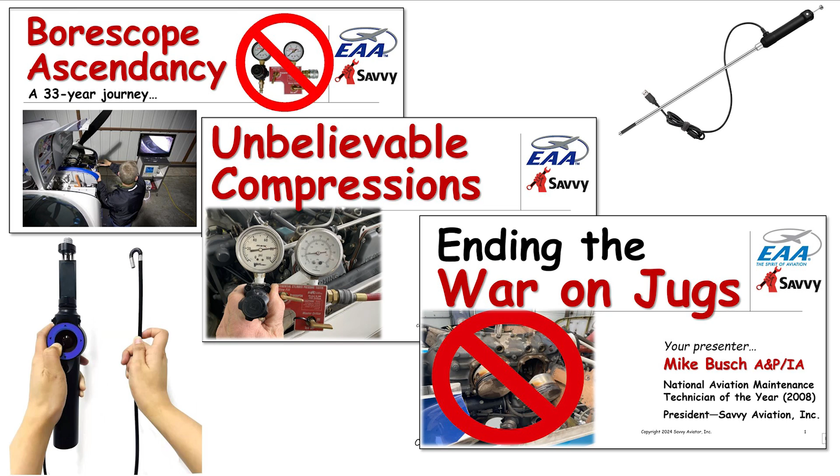Now, you guys may be sick and tired of hearing me talk about borescopes because I've talked about it a lot in previous webinars. Here are some of them, including the one I did last month called Ending the War on Jugs, where we talked about the fact that problems in cylinders don't always mean the cylinder needs to come off, and the borescope is what helps us assess whether a cylinder can be cured of its illness without removing it.

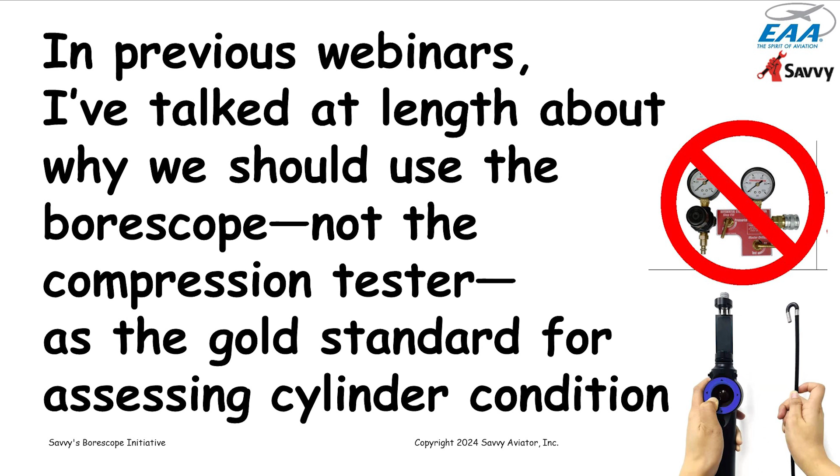So I've talked a lot about this stuff, and about the fact that the borescope is a vastly better method for assessing cylinder condition than the old-fashioned compression test, and that borescopes have become enormously better over the last few years, and their price has dropped precipitously. So you can now get borescopes that provide absolutely awesome image quality and the ability to take images we were never able to get before, at a very reasonable price.

The borescope here is a Vividia VA400, which at the time I made this slide a couple of weeks ago was on sale for $299.95, and somebody told me yesterday that they got one for like $225 from Oasis Scientific, who manufactures it. So they're kind of amazing bargains for what they do.

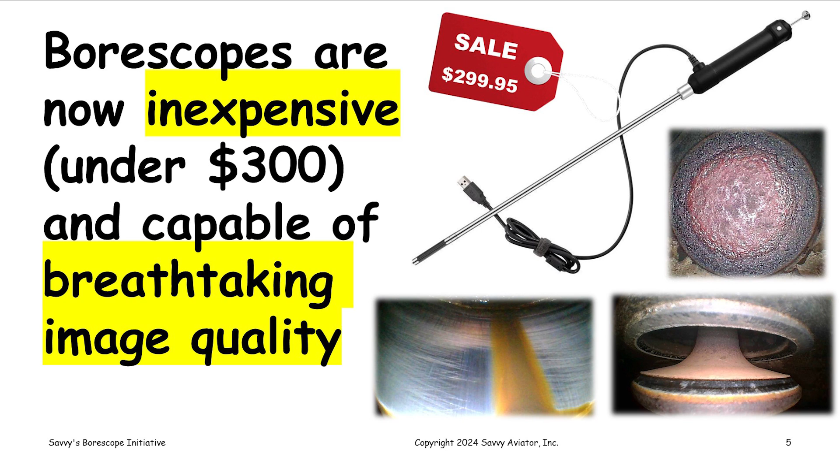The compression test may tell you that a cylinder is sick, but the borescope tells you exactly what's making it sick, how bad it is, and whether you've caught the problem early enough to remediate it without pulling the cylinder off, using non-invasive techniques I talked about last month - lapping valves in place if it's a problem with an exhaust valve, or doing a solvent ring flush if it's a problem with the rings and air getting past them.

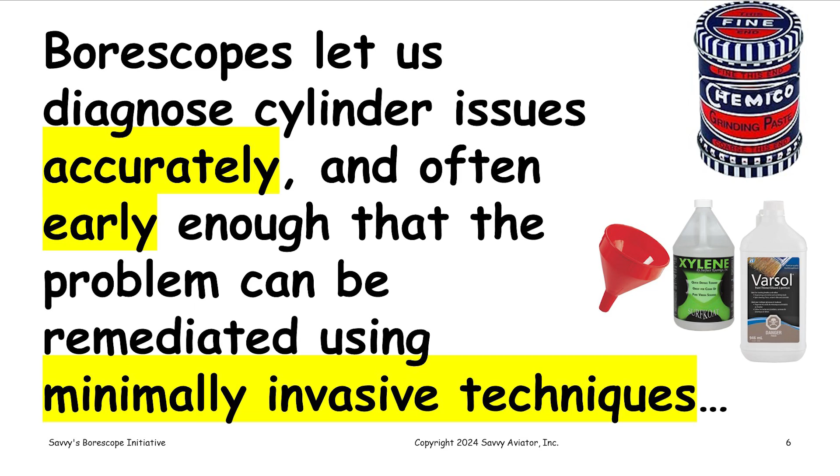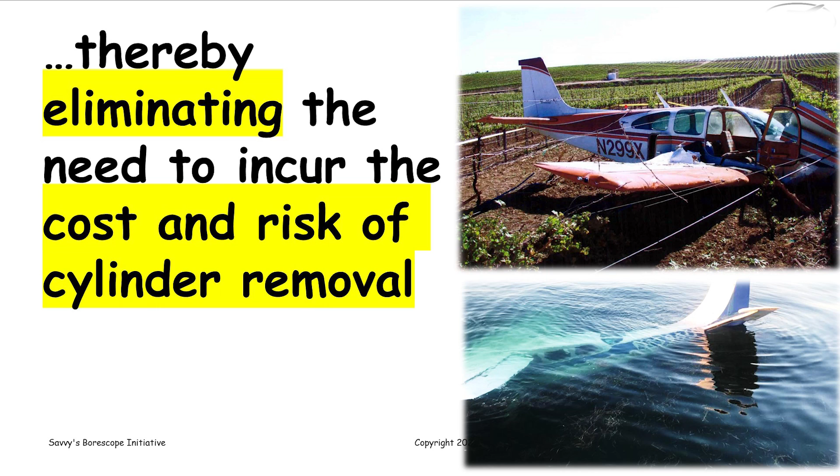And by doing this, not only are we saving a lot of downtime and money, but we're also avoiding the risks involved in cylinder removal and reinstallation. I think last month I put up quite a photo gallery of airplanes that went down shortly after maintenance, usually very shortly after, that involved cylinder removal, because it's just so easy to mess that process up when it's done in the field.

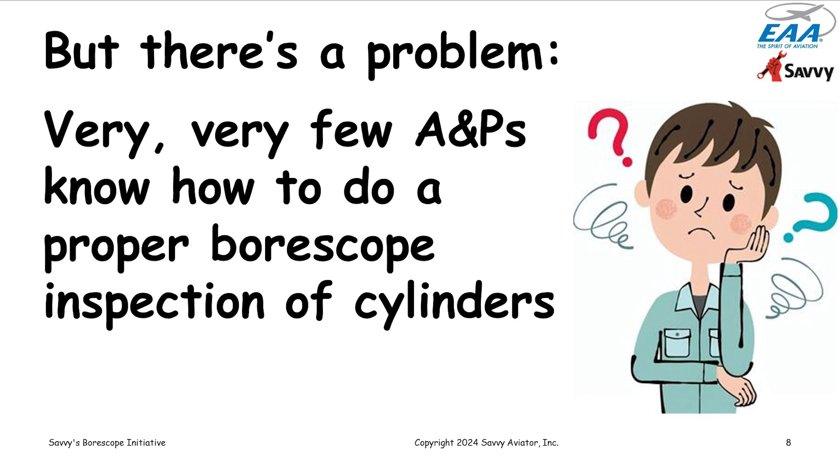But there's a problem I want to discuss tonight: although borescopes are absolutely wonderful things, very few A&P mechanics have ever been taught how to do a proper borescope inspection of cylinders. There's basically no training on this subject in any A&P school curriculum that I'm aware of.

Probably the reason that there isn't is because there are no questions about borescopy on the A&P knowledge tests that the FAA provides, and a lot of A&P training, unfortunately, is sort of teaching to the test. So it's not surprising that this isn't a subject that is taught very often.

And what's worse is there's nothing in the literature to show a mechanic how to do a proper borescope inspection. There's nothing in any of the service manuals. There's nothing in any of the service bulletins from engine manufacturers that talk about how to do a proper borescope inspection.

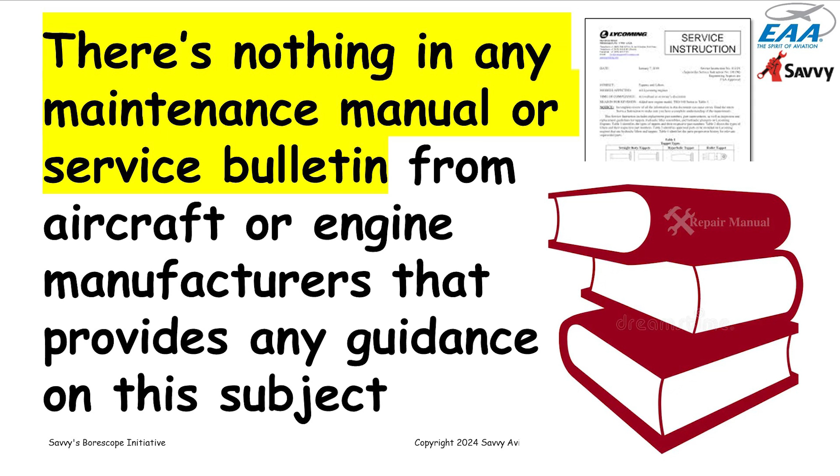Now, curiously, Continental started as early as 2003, saying that they require a borescope inspection every time you do a compression test, which means at least at every annual or 100-hour inspection.

But Continental offers not one syllable of guidance as to how to do the borescope inspection that they require. They tell you all sorts of stuff about how to do a proper compression check and how to manipulate the prop and what to do if you don't like the numbers that come up, but they don't say anything about how to do a borescope inspection, even though their guidance on this, which used to be Service Bulletin SB03-3

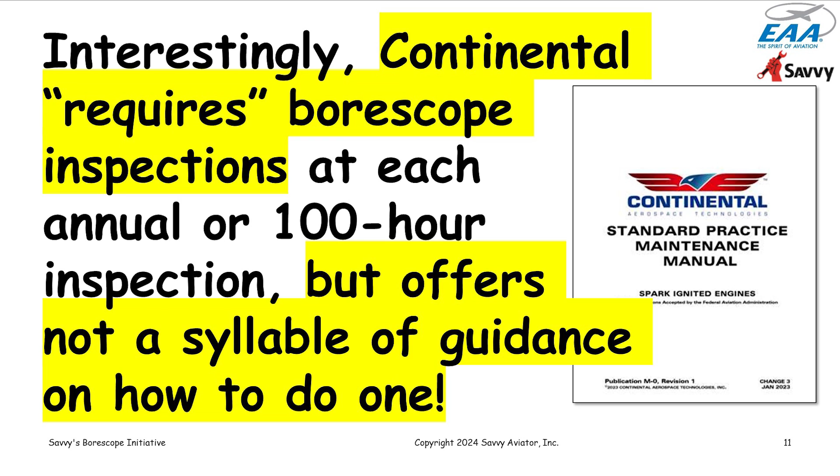and is now incorporated in the Standard Practices Manual M0, requires in context of a borescope inspection at least 9 times, and yet they don't say anything about how to do it. Lycoming is even worse, because Lycoming doesn't say anything about borescope inspections of cylinders. They're completely silent on the subject.

And because I've been such a nut on borescopes for many, many years, all of the people who work in my company, Savvy Aviation, get to look at lots and lots and lots of borescope images. I mean, I'm sure we've looked at tens of thousands of borescope images over the years.

And so we are pretty good at looking at these things, and we kind of know what to look for. But not a lot of mechanics have had that experience.

Most of the borescope images that we see, some of them are taken by maintenance-involved aircraft owners, but most of the images we see are taken by A&P mechanics all over the country, because we work with hundreds and hundreds of shops all over the country.

And a lot of the images we receive, especially ones that were captured by A&P mechanics, turn out to be diagnostically useless, because the person who shot them really didn't understand what it was we were looking for when we look at a borescope.

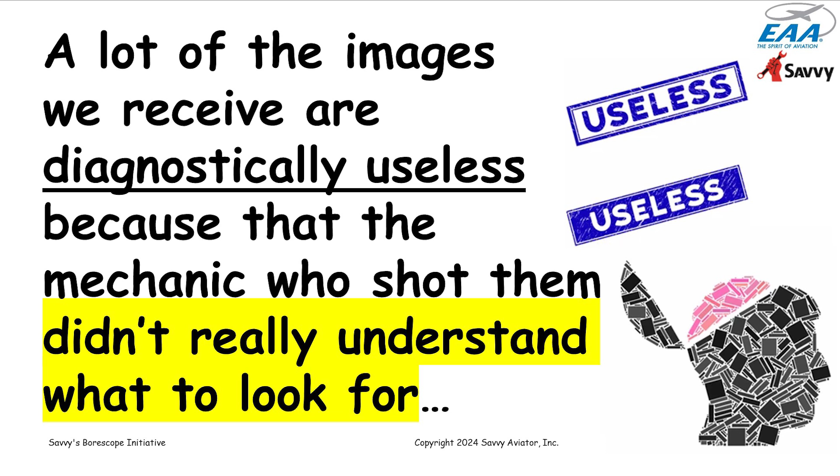So we'll see lots of images of what the head of the valve looks like, which is important because the head of the valve gives you a kind of a temperature map of how the valve is operating. But the most important part about a valve is whether it's sealing correctly or not, and the sealing surfaces of the valve, what's called the face of the valve, and the mating surface of the seat insert are really important to image.

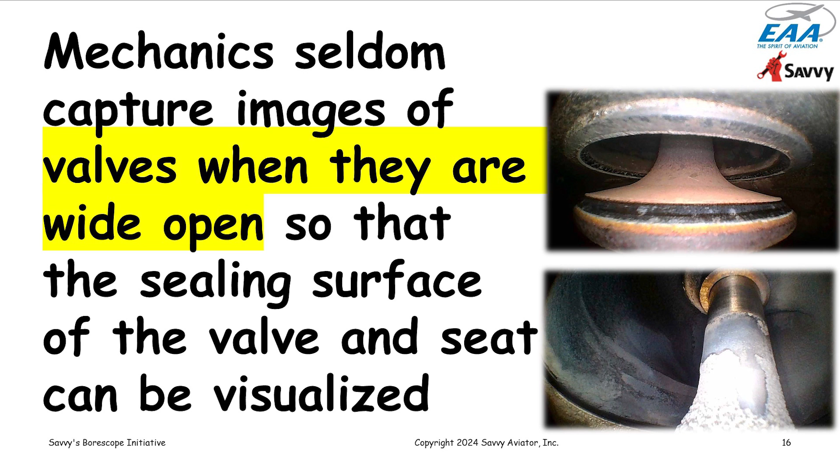Also valve stems and valve guides are very important to image, particularly in Lycomings where we have a lot of problems with sticking valves, and we want to see whether there's abnormal amounts of deposit buildup on valve stems, which might be a precursor to a valve sticking problem in the future.

So images like this, which you can see are just glorious detail of exactly what the sealing surfaces look like. This is an exhaust valve that's fully open.

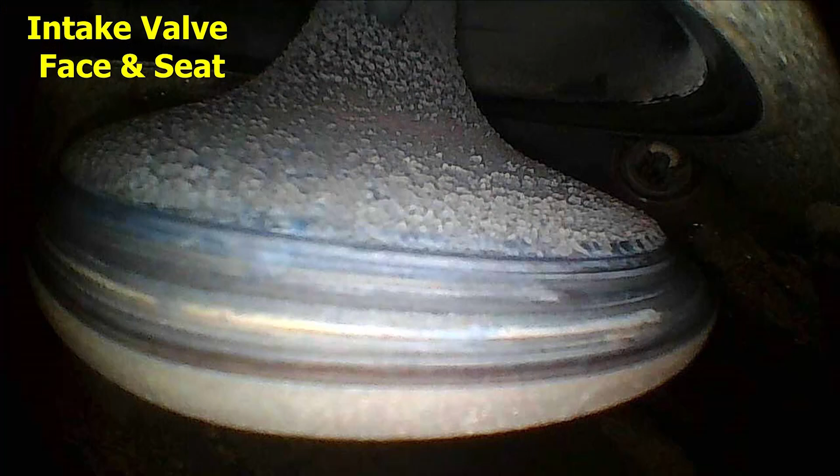We very seldom get to see views like this because mechanics don't understand how important it is to be able to see this. For example, this intake valve,

we want to see whether oil is getting into the intake port because of a sloppy fit between the valve and the guide. In this one, there is no evidence of oil, which is a good thing. But without an image like that, we don't get to see that.

Now, you couldn't take images like this 5 years ago. We just didn't have the instruments to do it. But now we do, and they're cheap, and it's really important to be capturing this sort of stuff.

So at any rate, it was clear that we had a pretty serious education problem, and we'd been talking about this internally for quite a while, and we decided to take the bull by the horns and do something about it. I want to talk to you tonight about some of the things we have done, and then briefly about some of the things we're still working on.

We really want to bring borescope inspections into the mainstream of how maintenance of piston aircraft engines is done, because it's so very important.

On January 1st, we officially launched what we call the Savvy Borescope Initiative. Briefly, some things we did, and I'll go into more detail about all of these in a moment. We published a standardized inspection protocol.

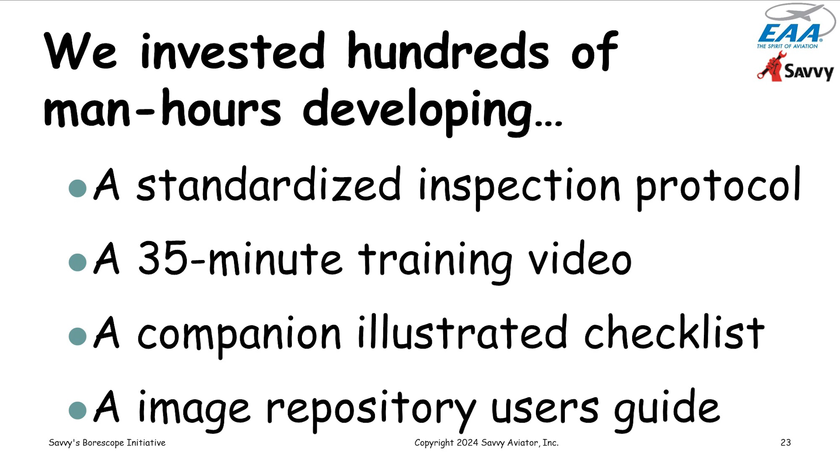And finally, an image repository with a user's guide, which we also put up on the internet for how to use it. I'll talk a little bit more about the image repository in a minute — what do you do with all these images once you capture them?

In addition to producing all of these written things and the video, we spent hundreds of man hours of software engineering time to extend Savvy's web-based platform, which already included all of our tools for analyzing engine monitor data and so on, to provide a platform for dealing with borescope images, where you can upload images to the repository, organize them, archive them, analyze them, generate reports of them, and so on. There was a lot of software involved, and all of this got rolled out in the first year.

The image repository is a place where you can take all these images that you capture, upload them into the cloud, tag them so that each image is marked with what cylinder it came from, which view it is, and what inspection group it is.

For example, the 2024 annual inspection on November 26, tail number 38X-ray, and keep it archived so you could compare these images with the images you take at the next inspection, and get some trend information.

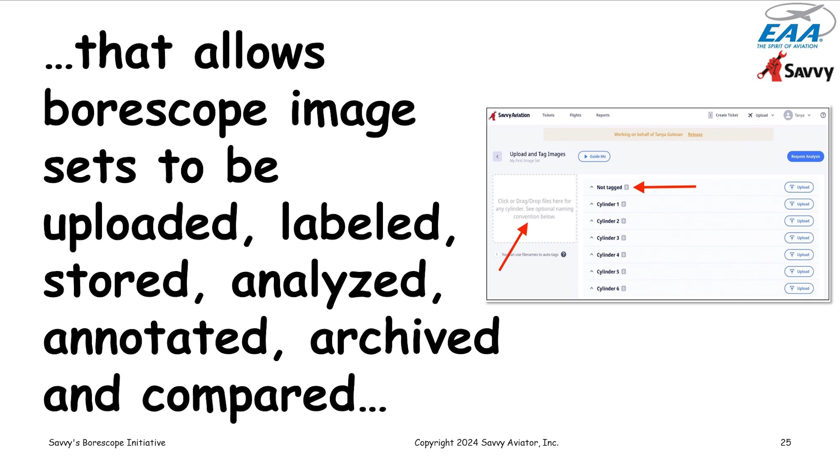The repository includes a report generator that lets you print out really nice looking reports. They come out as PDF files, which you can print out and incorporate into the maintenance records of the airplane. I'll get into all of this in a little more detail.

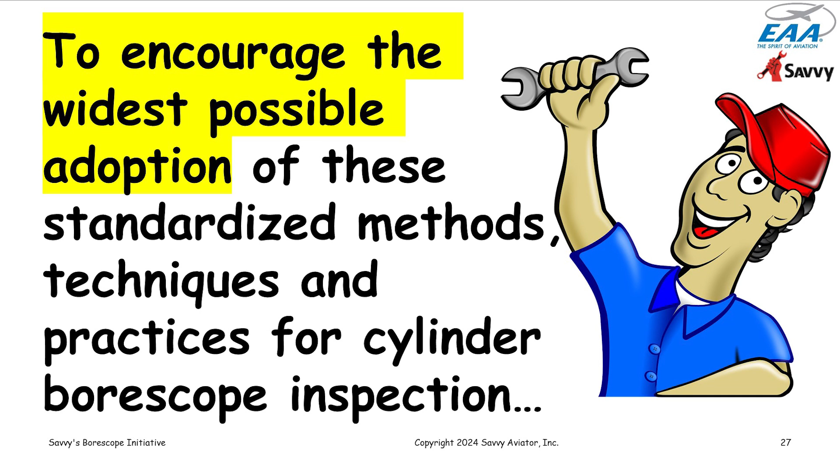In order to encourage the widest possible adoption of these standardized methods — the image protocol, the naming conventions, and so on — we decided to make this all available free to anybody who wants to use it, much in the way that some years ago we did with our engine monitor data repository, where we have about 6,000 paid clients at Savvy, but we've got 4,000 more people who open free accounts and use all of our software tools at no charge.

We decided to do the same thing with the Borescope Initiative. So all the stuff I'm talking about is available free to anybody who wants to use it — any mechanic, any maintenance-involved aircraft owner, all of this stuff is freely available.

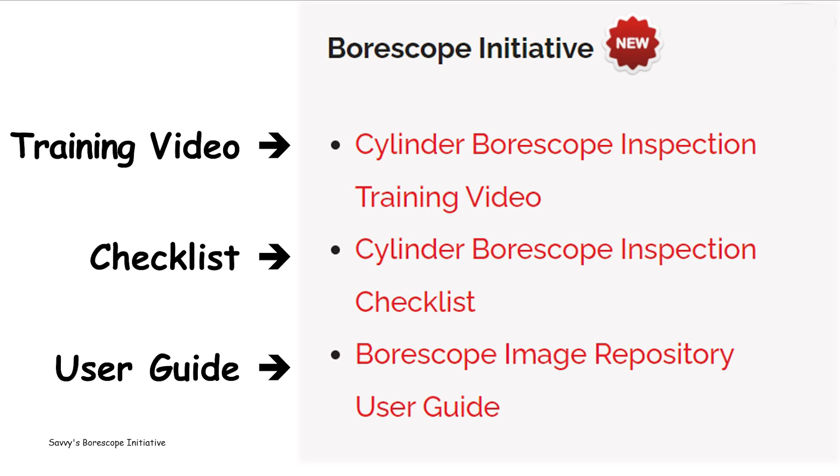Over on the right side is a box specific to the Borescope Initiative that includes links to the 35-minute training video, the illustrated checklist, and the user guide for the Borescope image repository. So all of this is available on the website, and again, all of it is free for anybody who wants to use it.

So with that as an overview, let me go into a little bit more detail about some of the things I just introduced you to. First of all, the inspection protocol.

If your doctor sends you in to get an abdominal MRI or a CT scan of the lumbar spine, it doesn't matter which radiology tech does it, because they all follow a common protocol for doing the imaging.

So that the radiologist gets the same stuff regardless of which tech was on duty running the machine. Well, we felt that we needed to do the same thing for cylinder borescope inspection. We needed a standard protocol for what images to take and in what sequence, just like at a medical imaging center, or even at the dentist having X-rays taken of your teeth. Those are always done using a standard imaging protocol.

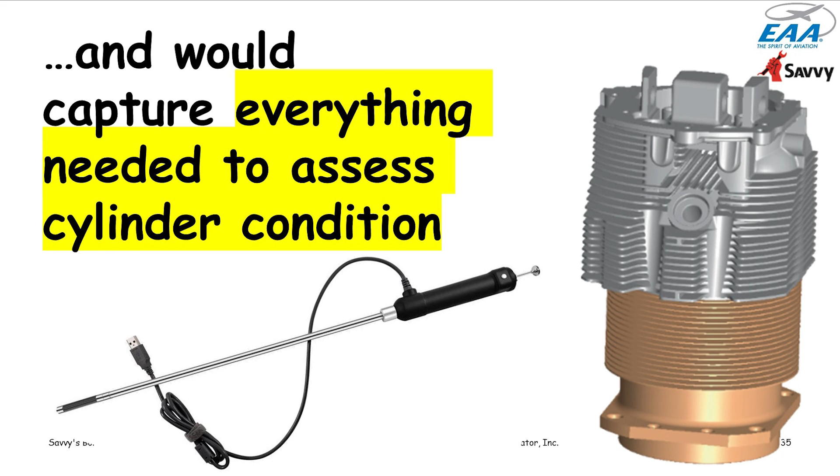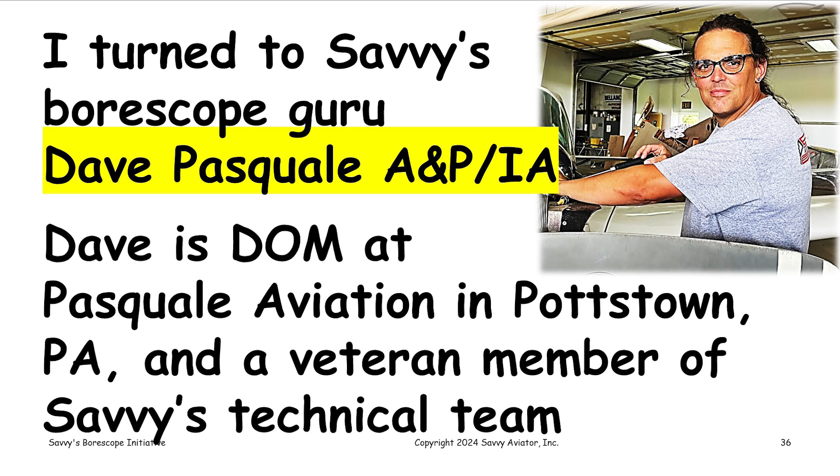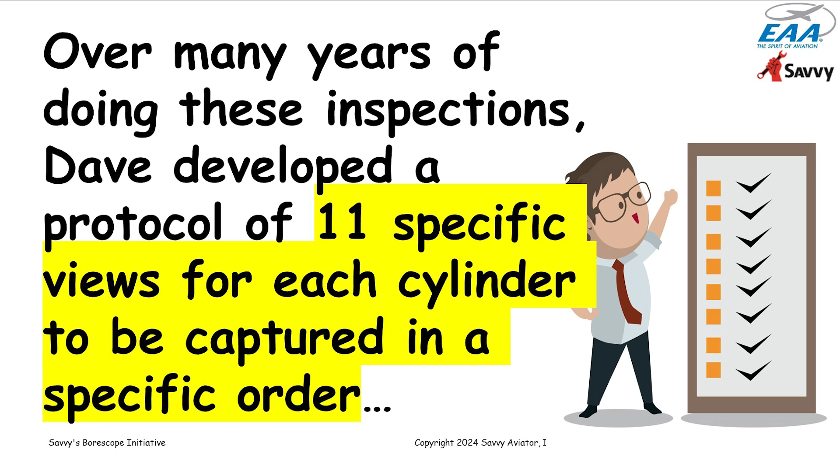So at any rate, we turned to Dave Pasquale, who's been a longtime member of the Savvy team. Dave is a very experienced A&P/IA who owns a shop in Pottstown, Pennsylvania. He's actually one of the 2 or 3 shops in the country that specializes on Bellanca Super Vikings, but he's done a lot of pioneering work in various areas, including borescopy. So we worked with Dave to develop this protocol, and it involves capturing 11 specific views for each cylinder, and gives a specific order for capturing them. The video illustrates the procedure for doing this.

Then we take the valve images with the valves closed. Those are the ones everybody always takes: the exhaust valve head with the valve closed, and the intake valve head with the valve closed. It's important to position the scope so you get the entire valve in the image. We don't want just a third of the valve, which we get a lot with close-ups where there's no context. So those are the first 3 images.

Then we start taking a series of images with the valves open, and I showed you some good examples of those. The exhaust valve seat and face. The face of the valve is the sealing surface of the valve. The head of the valve is the part you see when the valve's closed. So this is an image of the valve face and valve seat, in other words the sealing surfaces, taken with the exhaust valve wide open.

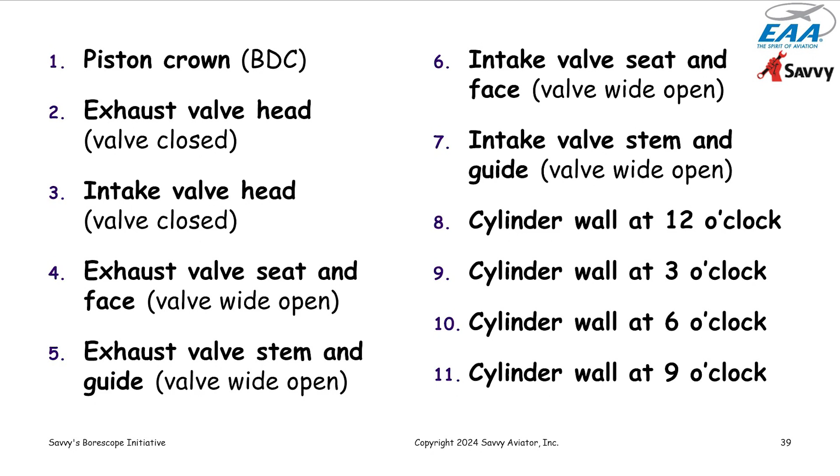So those are the 11 images in the protocol, and that's the order we recommend they be taken, the same order you'll see Dave perform if you watch the training video. Now, 11 views may seem like a lot—that's 66 images for a 6-cylinder engine—but we really feel this is what's needed to cover all the bases and see everything important. With a little practice, you can take the 11 images in about 5 minutes, so for a 6-cylinder engine, you're talking about 30 minutes to get all 66 images.

It doesn't take very long to do this. It takes a little bit of practice. The first time you may have to think about it quite a bit, but very quickly it becomes automatic.

Taking 44 images or 66 images to do a complete borescope inspection of the cylinders on an engine is not excessively burdensome. Of course, this assumes that the top cowling is already off and the top spark plugs are already out, which would both be the case when you're doing an annual inspection anyway. So you're not doing anything additional there.

My theory is any time a spark plug is out of a cylinder, it's sort of malpractice not to stick a borescope in the hole and look around. It's like if you pulled a cylinder off an engine, wouldn't you look and see what the cam looked like? Of course you would. This is the same thing.

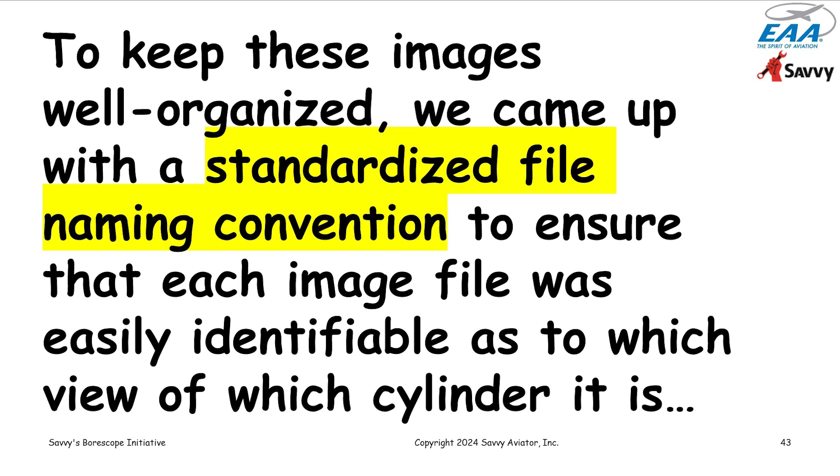In order to ensure that when you wind up with 44 or 66 image files, you can figure out what you've got - it's not necessary to use this naming convention. It's just something we recommend, and it's a convenience, but it's not mandatory.

But our naming convention is very simple. The file names start out with a digit, which is what cylinder it is, and then 1 or 2 words describing what the view is. So a file called 5-piston.jpg is an image of the piston crown on cylinder number 5.

1-exhaust-head.jpg is a cylinder number 1 exhaust valve when it's closed, and so on. So they're very simple. And the last one is 4-wall-12, which is cylinder 4 cylinder wall at the 12 o'clock position. So it's not very hard to remember this naming convention.

And actually, our software, when it parses these file names - I'll talk about that in a second - uses some fuzzy logic. So even if you get the file name slightly screwed up, it'll usually be able to figure out what you meant.

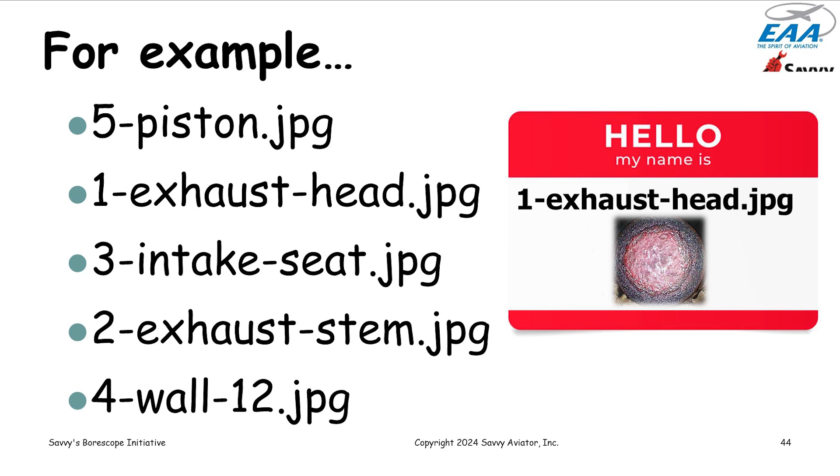But basically, it's a cylinder number and then a word or 2 describing what the view is, and then of course the file type, which is usually JPG, but it can be PNG or some other image format as well.

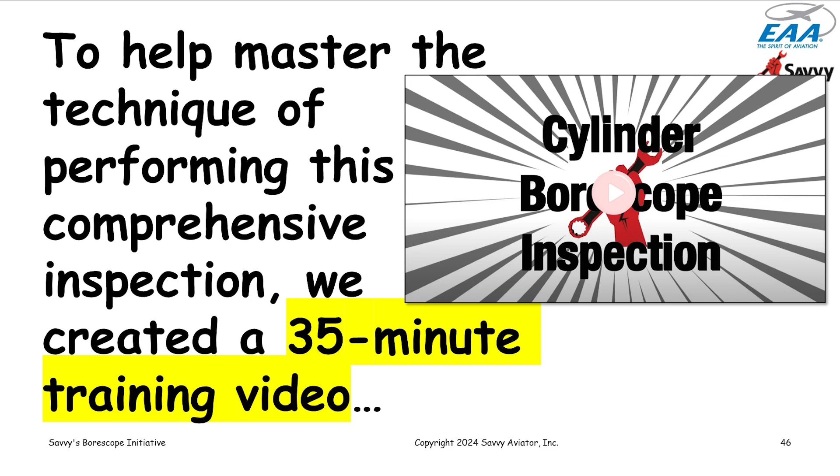So anyway, after having devised this standard image protocol and file naming convention, we created a 35-minute training video starring Dave, and it's aimed primarily at A&Ps, but it's also of interest to maintenance-savvy aircraft owners who want to do their own imaging, and an increasing number of aircraft owners have decided to spring $250 or so and buy their own borescope, especially ones that do their own oil changes and spark plug maintenance and so on.

And in today's world of shops booked up a year in advance and a pretty acute mechanic shortage, more and more owners are sort of being forced into doing a lot of their own preventive maintenance, and so this is a good thing for owners to be able to do.

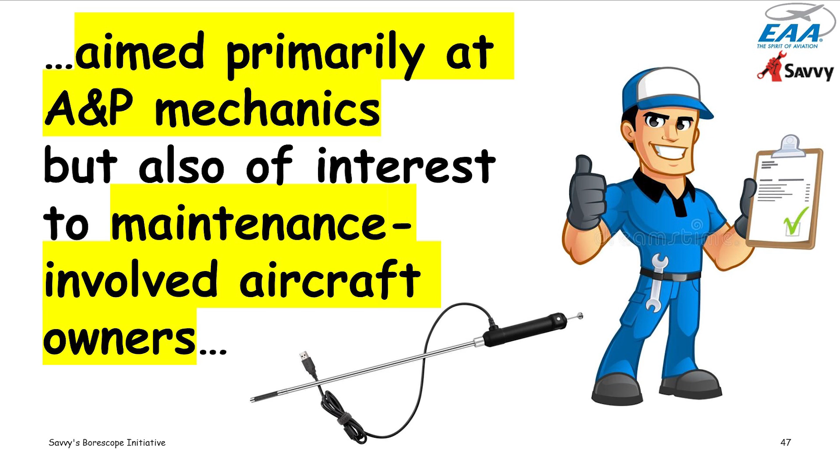But our primary audience for all of this was A&Ps, but it's certainly applicable to anybody who's interested in monitoring the condition of their cylinders. So the video shows Dave, but Dave was going through one of his facial hair episodes when he did this video.

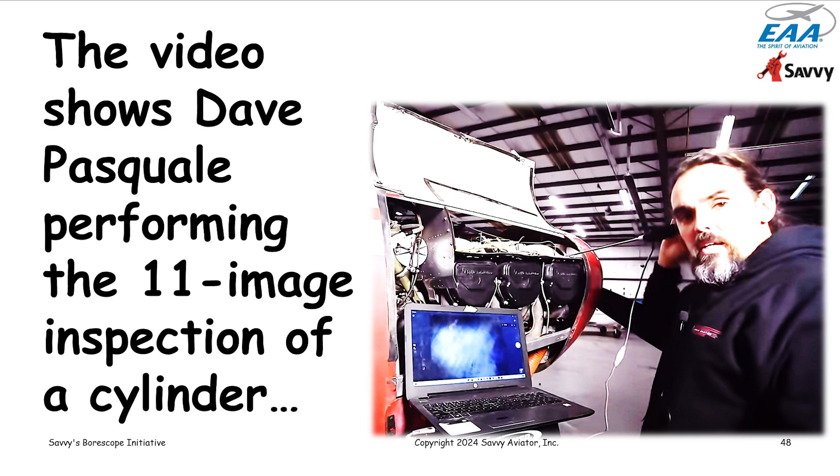But he talks you through everything and shows how he positions the scope to get the right image, then shows the full screen version of the image that he just took, and then goes on to the next one. So it's a pretty interesting video.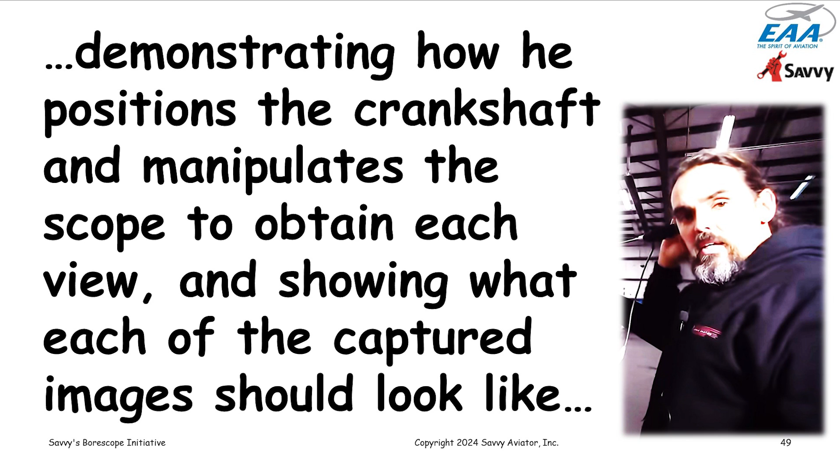So he demonstrates each of these images in the 11 image protocol.

And because mechanics always like to have written guidance, although I think the video is very instructive, and it's definitely worth the 35 minutes it takes to watch it, we also developed a companion checklist.

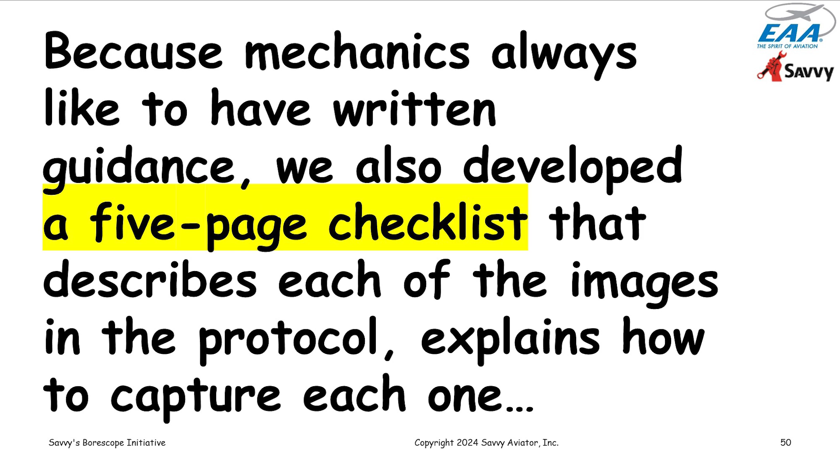It's 5 pages long, describes each of the images in detail, shows sample images, descriptions of how you get the images, and then on the final page of the 5-page checklist, it goes into the details of the file naming convention that I just talked to you about.

So once you've got all these images, hopefully you've named the files something recognizable, although that's not a mandatory requirement. Then the question is, what do you do with the images?

So we created this image repository, which is a software front end to a cloud storage thing. All of these things are actually kept on servers at Amazon Web Services. And it gives you the ability to upload all these images into the cloud, where they can be archived on a permanent basis. There's no limit on how much data you can upload or how long you can leave it there.

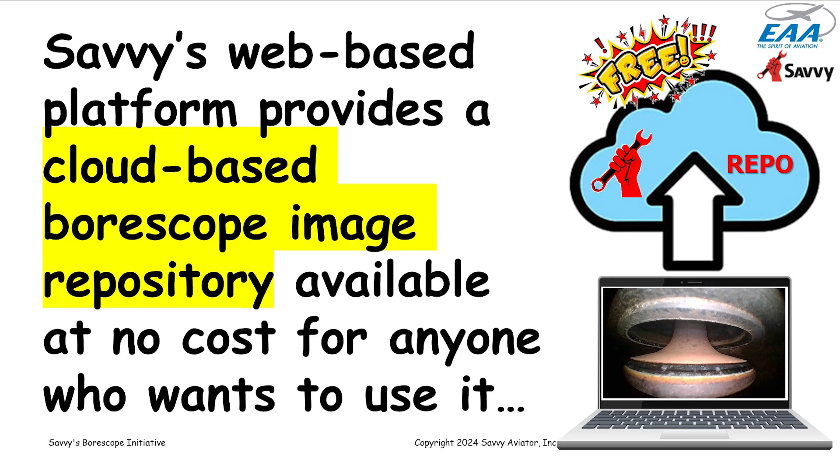It's just very much like our engine monitor data repository, and we provide it all free to anybody who wants to use it. You'll need a free account so that the system knows who you are. But once you've opened a free account, you can upload Borescope images to your heart's content. You can also upload engine monitor data to your heart's content.

If you drag a file or an image into that box that doesn't have a recognizable file name, it just puts up some buttons, and you click a button for what cylinder it is, you click another button for what view it is, and then it tags the images. So it's a little quicker and easier if you've named the files according to the convention, but if you didn't, it's not a big deal. It just says, tell me what this is, you click a cylinder number button, you click a view button, and the image is automatically tagged.

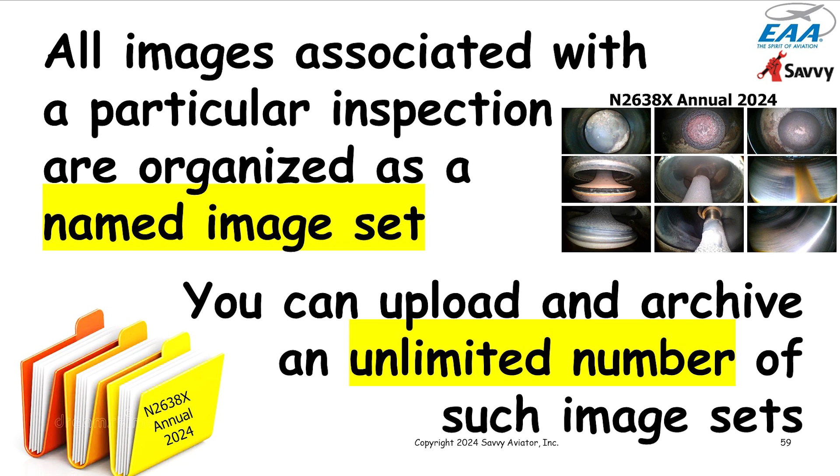And you can upload an unlimited number of image sets to the repository at no charge. There's actually an ulterior motive for us doing this, which I'll tell you about towards the end.

So once you've uploaded all these images, the system has a report generator that allows you to print very nice looking reports of these images, all neatly labeled as to which one they are, and with commentary on it, where either you, your mechanic, or in some cases a savvy person can look at these images and say, this one looks good, this one looks like maybe it's a burned valve.

And all of that information that you tag it with will come out when you generate the report. The report comes out as a PDF file, which you can print out if you want to, and you can incorporate it into maintenance records.

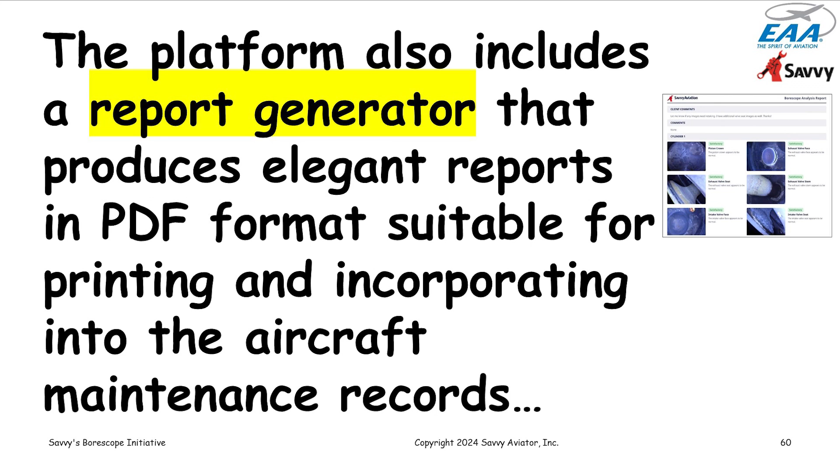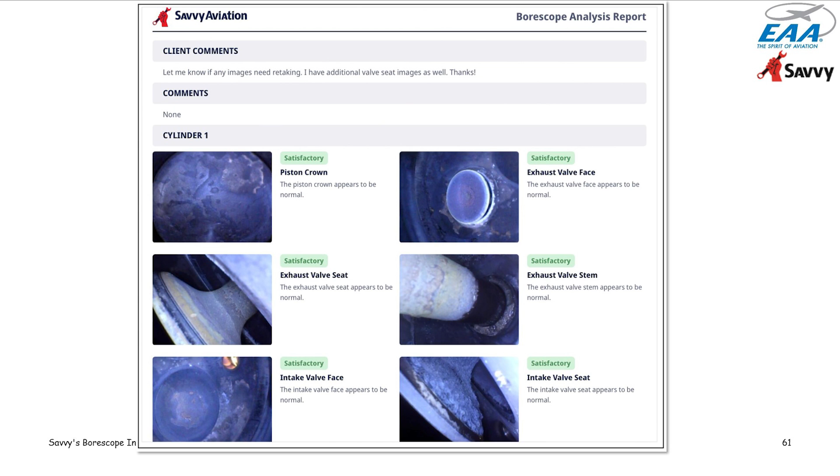Here's kind of an example of one page of a report, so you can get a general idea what it looks like. These images were all marked satisfactory, but sometimes you won't mark them satisfactory. You can mark them satisfactory and unsatisfactory, and you can click on various buttons saying various kinds of conditions that might be wrong, and you can also annotate them with free text if you want to.

And if you're doing this with a free account, you or your mechanic can do the analysis and can annotate the images in this way.

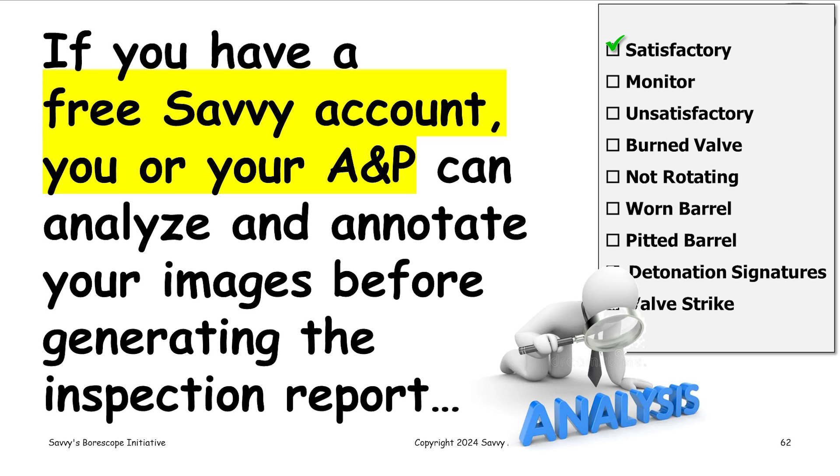If you are a paid Savvy subscriber of Savvy Analysis, or any of the higher tier plans like Savvy QA or Savvy MX, then there's an additional button that shows up on that screen that is marked Request Analysis. If you click that button, the image set gets assigned to one of our analysts. They go over the images, annotate them as to what they consider the various images show, and then they generate the report for you with their commentary.

So you can either do it on a do-it-yourself basis, or if you're on a paid Savvy plan, you can have Savvy staff do the analysis. Again, it's very parallel to how we handle engine monitor data, in that we provide all the tools for analyzing it for free. If you want our staff to do the analysis, you have to have a paid account. But if you want to do it yourself, it's all free. So all the tools that we use, we make available free to anybody that wants to use them.

So we hope that doing it this way and making all these tools available free will help this initiative, the standard protocol and so on, gain wide industry acceptance by shops and mechanics and by maintenance-involved owners, to provide some sort of standardization in an area that there just hasn't been any.

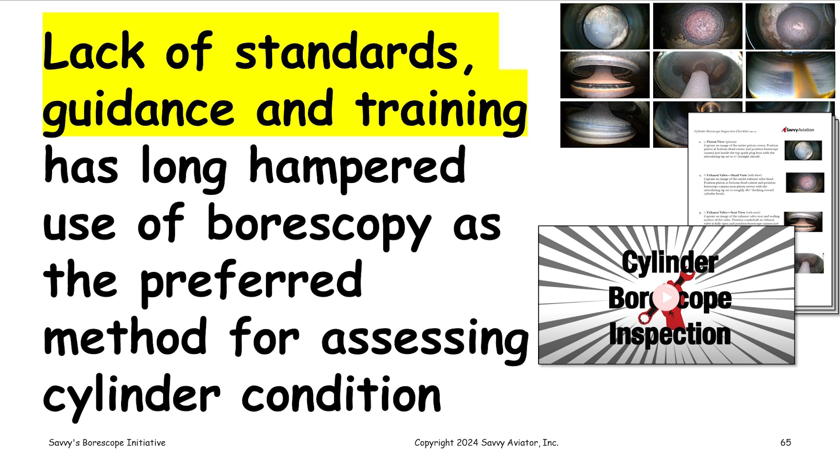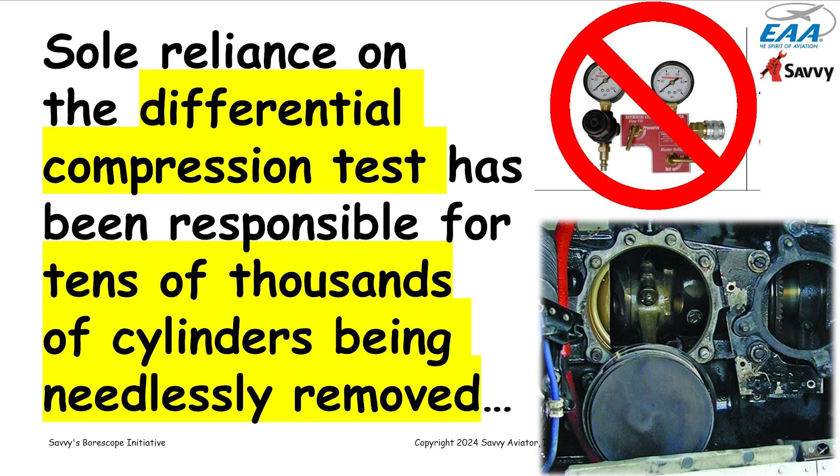It's just a much more discriminating and much more revealing tool than the compression tester is. And relying solely on compression testers and saying if it's weak compression the cylinder has to come off has been responsible for tens of thousands, if not hundreds of thousands, of cylinders being unnecessarily removed, which is not only expensive but also subjects people to risk they shouldn't be subject to if it wasn't really necessary to pull the cylinder off. So our goal is to change that, and that's what this borescope initiative was all about.

But we're not done yet. That's kind of where we are right now. But I said we had an ulterior motive, and here's what it is.

We want to build the largest collection of borescope images of cylinders ever assembled. And the reason we want to do that is so that we can start training machine learning neural networks in order to eventually be able to automate the process of analyzing borescope images.

I've talked about in previous webinars the work that we're doing in engine monitor data analysis in this area. We already have a machine learning model that tries to predict the probability of exhaust valve failure. We're working on a project called Gadfly, which is now in a pretty advanced state of development, where we're analyzing engine monitor data looking for all sorts of anomalous conditions that the aircraft owner ought to know about.

And we want to do the same thing with borescope images. We basically want to train machine learning, artificial intelligence, to be able to look at images and flag the ones that look like they're problematic.